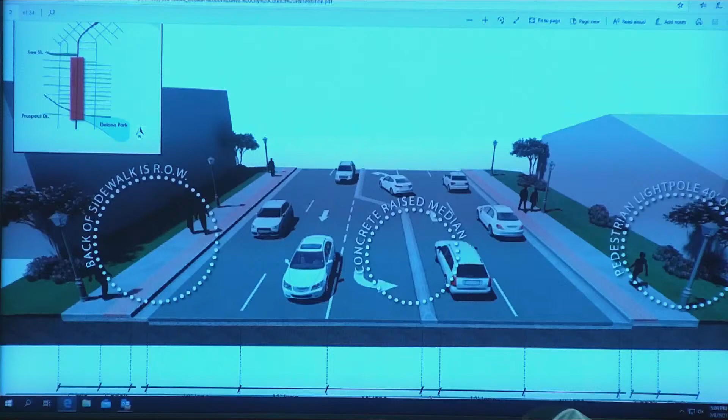On the Delano to Lee Street section, we looked at more access control, leaving that center lane open. On the other section, to the bridge, we did introduce a landscape median, and I can go through some of that. But basic elements of the streetscape, we're looking at adding pedestrian scale lighting. We're looking at widening the sidewalk and adding this paver colored buffer here. So right now it's pretty narrow, 3 feet wide sidewalk in some cases. We're actually expanding. Scroll up just a little bit. There we go.

Oh, there you go. Sorry, I just wanted to check out these dimensions down here. So we've got a 5-foot walkable area. We also have a 3-foot wide brick strip, total of 8 feet wide.

So right now when you're walking out there, it's 3 feet wide. You feel like you're kind of teetering on the edge. It's a little dangerous. Adding an extra 4 feet of width really gives people more confidence. They feel safe. This is psychological, that little band of pavement, but it really kind of works to make people feel like there's at least some separation between them and the lane widths.

As I mentioned, we are leaving the lane widths the same, 12 feet. We studied reducing them and doing some other things, but there are some real issues with that in ALDOT as they just improved this road. And to maintain the volume of flow, we need to leave the lane widths the same.

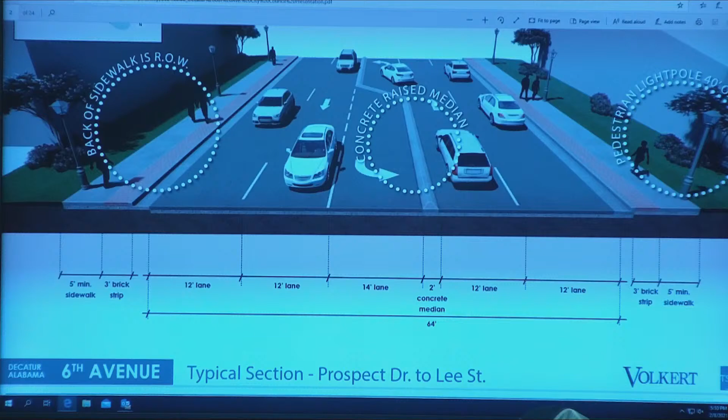And then Volkert did a very extensive look at access control on this section of road, which is basically turning movements across traffic, looking at intersections, looking at adding stoplights, and then also looking at mid-block crossings. We have plans all through the corridor we can go through. So next section, please.

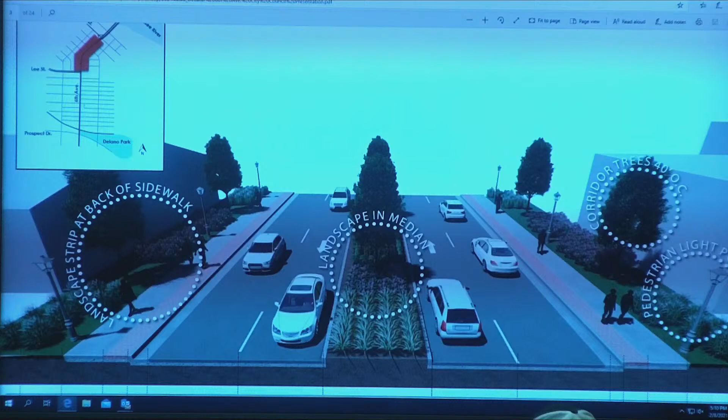Okay, so this is the other section with the landscape median. And this one's got a big tree in the middle of it, which we're talking about doing. But I think the important thing to note is the width of the center lane. In these areas, we don't need to be able to turn across traffic except at intersections. And where we're at intersections, we're actually tapering the height of the landscape down to 24 inches maximum. So we're leaving clear view corridors across the way.

And then we're also adding, just outside the right-of-way in this area from Lee Street to the bridge, some street trees to try and soften the edges, create a canopy over time. It won't be instant. These things take 30 years, but it's time to invest in it now so that when people arrive off the bridge, they're welcomed with this arching tree canopy.

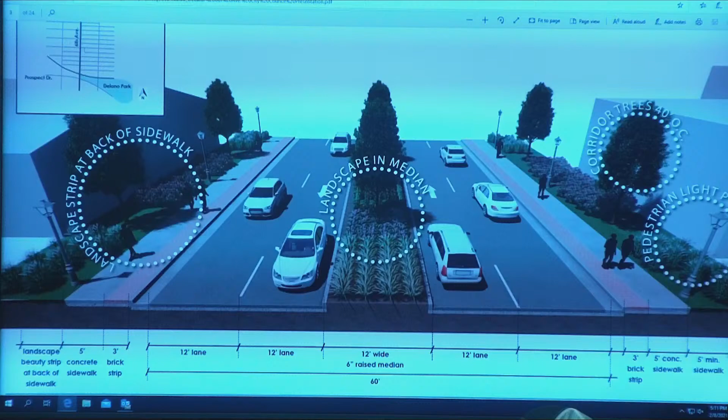Same idea down here with streetlights. So one thing to note is that on one side of the right-of-way, there's already an existing buffer. On the other side, it's going to be a conversation with adjacent property owners to see if they will allow us to plant shade trees in that area. So, next slide. Okay.

So, walking from Prospect towards Lee Street, we've got a number of these different elements that we just looked at. We've got the concrete sidewalk. We've got turning lanes where we need them, and where we don't, like here's an instance where we did some traffic control. And you guys can talk about this a little bit. We went to a median just to provide separation there, and in this case, I think this is where we added one of these mid-block crossings.

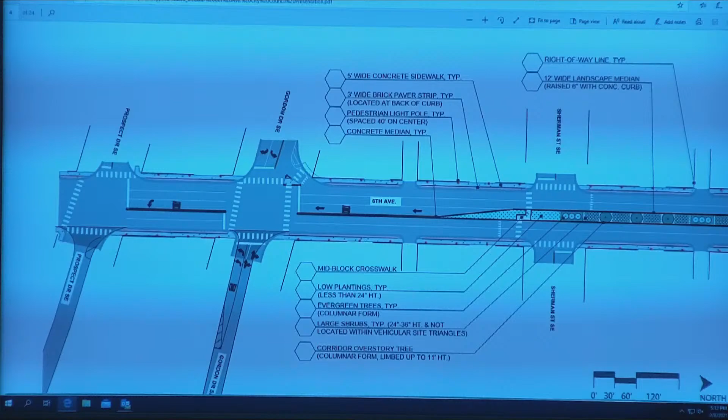So yeah, on those sections, this is at Delano Park there, and on the next slide we'll get to how to help the traffic flow in these two intersections that are so close together. But this is kind of a neighborhood feel, and a lot of the existing structures are really close to the roadway, so it's a lot tighter corridor here than it is as you go further north towards the bridge.

So on a couple of these streets, there's just not enough cross traffic, so we can add the median in to soften the edge, because we don't have room to soften the corridor on the outside because of the structures. We're using the median to soften the corridor in this area.

But talking about these two intersections at Gordon and Prospect around Delano, I'm sure everybody knows how close those lights are together, and there's schools and everything. It gets congested at certain times of the day. So one idea we had, and we talked to the school board about this and it seemed to have their support, was making Prospect and Gordon here on the east side one way. So it'd be a counterclockwise one-way loop. Can you go to the next slide, please?

So what that does is it basically takes those two signals that are kind of operating independently now and makes them work together with a one-way loop around the park. And then there's a lot of benefits to that. One, the traffic flow and safety on 6th Avenue is drastically improved.

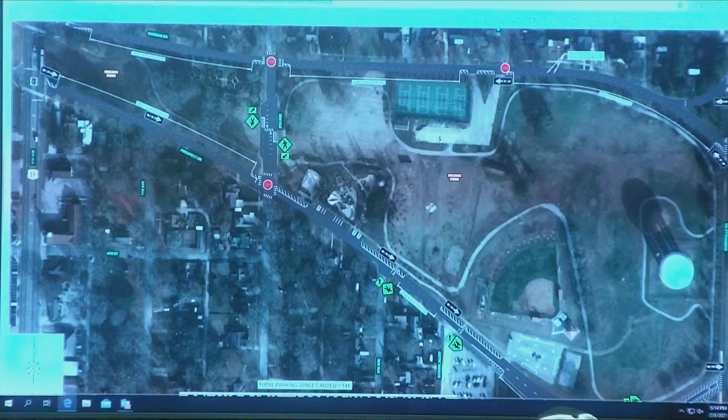But also, if we're using the same asphalt footprint that goes around the park now, and with it one way, we can actually add parallel on-street parking adjacent to the park to get better access and better utilization of the park. Also, with the traffic flows for the school, again, we worked with the school board about this, and this is what they prefer versus the clockwise movement, because of how their buses and their traffic come in, they come in and go to the alley here and do their pickup and drop off. So this actually worked really well with their traffic flow.

So it came out of the idea of how to fix the 6th Avenue intersections, but it actually became a pretty good idea around the park, and again, the great thing about this, we're not talking about any new asphalt, this is existing asphalt, it's literally restriping the current roadway and putting some signs up, that's all we really have to do.

Part of the discussion we had last week was what to do about this 8th Avenue portion that goes to the middle of the park. Right now, there are traffic signals at both those intersections, those don't really need to be there, they could be four-way stops and be just fine.

And part of that too was also doing some type of mid-block pedestrian crossing for the park, whether it's like a speed table with a pedestrian crossing or something like that, to make it safe for parents and kids going from one side of the park to the other, and also have a little more traffic calming there in the middle of the park.

So this Johnston Street is another one that we didn't feel we needed turning movements into. So they're pushing traffic down to this corridor, but I think in all those cases it looks like we provided. Yeah, that was one of the pieces of feedback that we got from the stakeholder group, even if we were restricting left turns in these blocks, allowing those pedestrian crossings to happen in those blocks to have that great interconnectivity between the neighborhoods on each side. And with the median in there, you have a nice refuge, so it's safe.

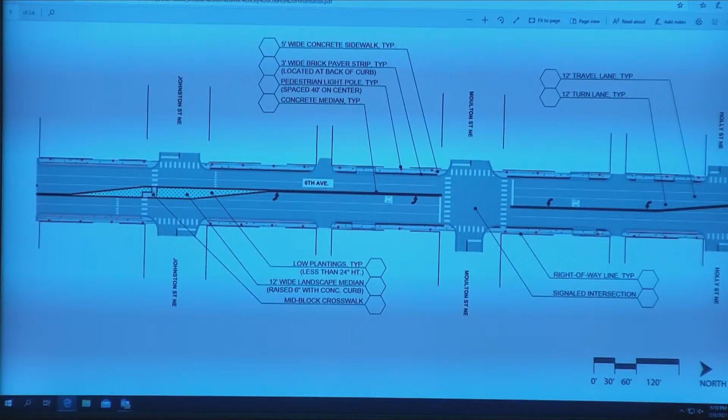You're not trying to sprint across 60-something feet of asphalt and traffic at one time. You can get to the median and get to the next one. And there's a lot of things you can do with those mid-block crossings with pedestrian signs and yield to pedestrian. So there's a lot of little details like that we'll have to work through on that piece. But the idea was to maintain that pedestrian connectivity in the neighborhood.

Other safety things you'll see as we come down farther this way, the drives are more delineated. Right now on certain properties, the entire edge is a driveway and the sidewalk's not defined. So a lot of what we're doing here is really just defining different zones, vehicle zones, pedestrian zones, driveway zones, not with the idea of limiting access to the parcels or to the businesses, but just clarifying and making it safer for people who are walking or for folks that are turning into those driveways. Next.

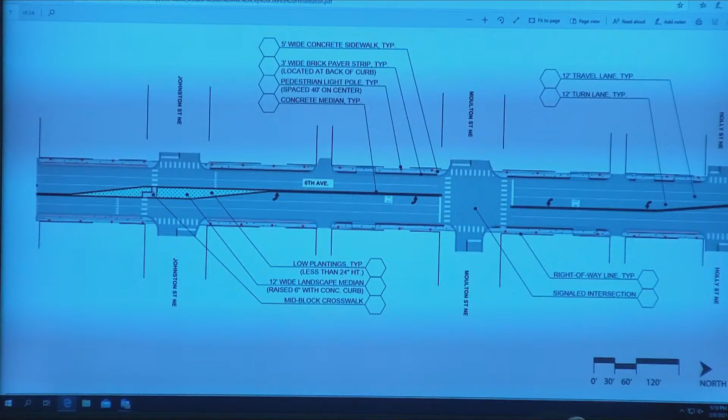At Lee Street, because it's the main kind of entrance into the downtown area off 6th, we're going to do a more kind of special intersection with pavers or colored pavement. Something that matches the kind of historic pavers, and we're also going to run anywhere that you turn into the historic district a band of those pavers. So you're kind of crossing a threshold into the historic district off of 6th Avenue.

This is where the really continuous median starts as well. And then we also looked at some traffic calming in this area. You've got a lot of lanes going into downtown and probably more capacity there than you need. So did we, and we added that parking there too?

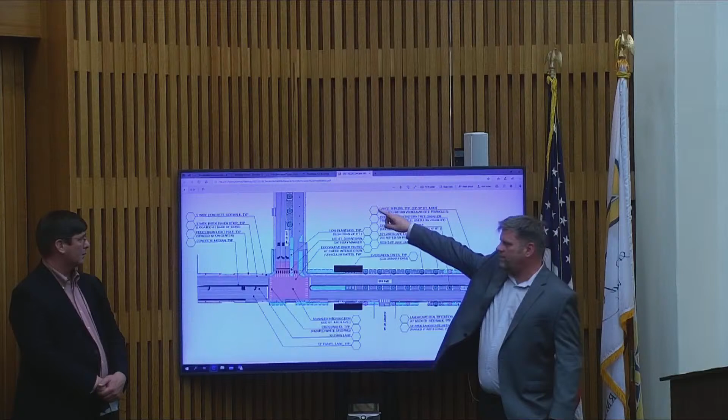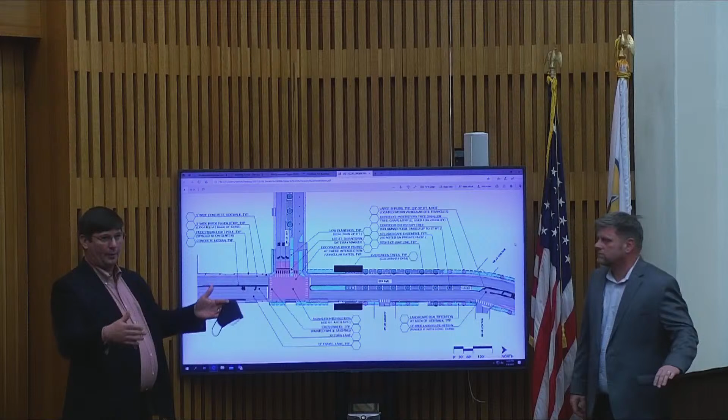Yeah, so that was kind of a similar concept that we're talking about around Delano Park, is that right now there's 2 lanes in, 2 lanes out, or actually 3 lanes out of downtown. And there's way too many lanes for the amount of traffic that's coming in using Lee Street. So again, putting it on a little bit of a road diet, reusing some of that asphalt area for some on-street parking and some landscaping areas can really enhance that entrance into downtown proper off of 6th Avenue.

So Lee is kind of where all that's happening. That's really where you introduce people. You already introduced them into Decatur coming over the bridge. Now we're going to introduce them into downtown off Lee. That was kind of the concept there.

Right. One other important thing that we have here is a marker. At Delano Park, there are those tall stone columns that are markers. We're also proposing a couple key locations along the corridor for a marker that's similar to that. It's going to be brick.

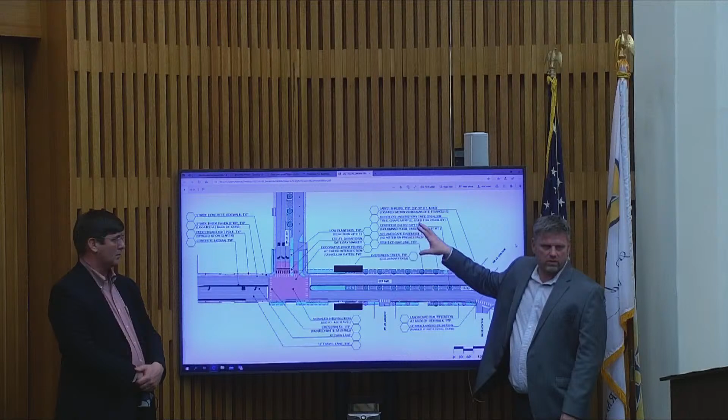It's not going to be stone because we want the one at Delano Park to have its own unique look and feel. So we're trying to make ones associated with the historic district and the entrance of town a little bit different, but to feel like they're in the same family. So we're saying one of those might happen there in the center island.

And then the other important thing about this is this Walnut Street intersection. I think it's the only street that we're just saying no access to, right? Yeah, so right now it comes in at a skewed angle in a curve, and it's kind of a dangerous situation on 6th. And right now, Katie, it's one way right now.

So one thing we talked about doing would be, if we cut off the access to 6th, but also make it 2 ways, so it becomes strictly a residential street. And it becomes a lot safer because you can see the sight distance and that curve and all. It's just really not an ideal situation.

But we did leave the left turn into the east side of Walnut because of some of the commercial uses over there. We kind of had to maintain some delivery access. So that left turn onto the east side did remain.

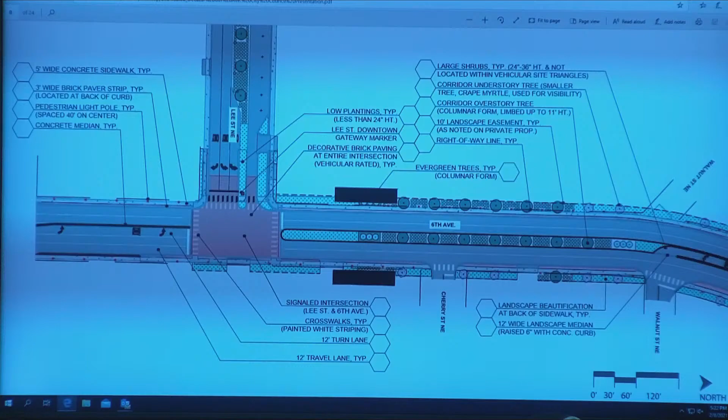And remember when I was talking earlier, I mentioned the landscape easement area. That actually would start up here. This dashed line is that easement. We have constricted right-of-way here that just ends at the back of the sidewalk. So to get the street tree feel, that's an area that we would recommend grabbing an extra 10 feet of some type of easement that would kind of add to the character of the street.

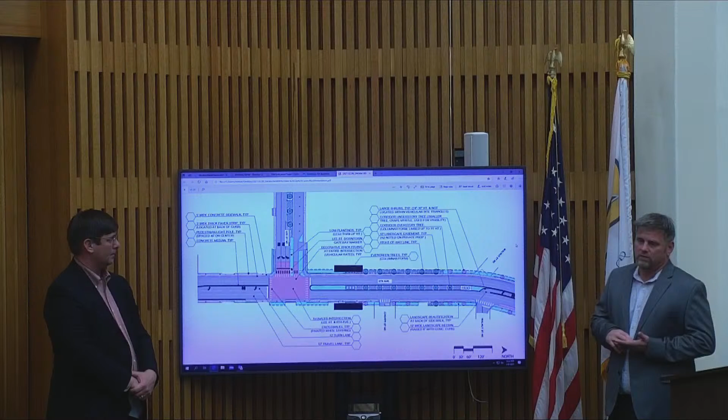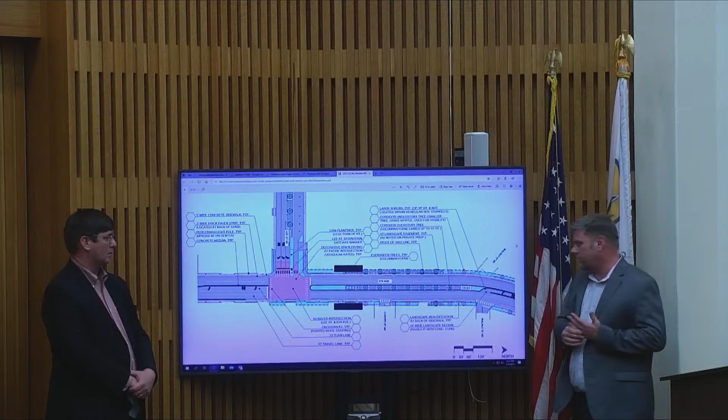That also is a way to bypass some of the ALDOT requirements not to have larger trees in the right-of-way. So doing that allows us to put larger, more mature canopy trees adjacent to the right-of-way that y'all would own and take care of. Fine.

So this is kind of more of the civil plans, talking about the traffic flow. We've covered a lot of this already. This is back on the Delano Park.

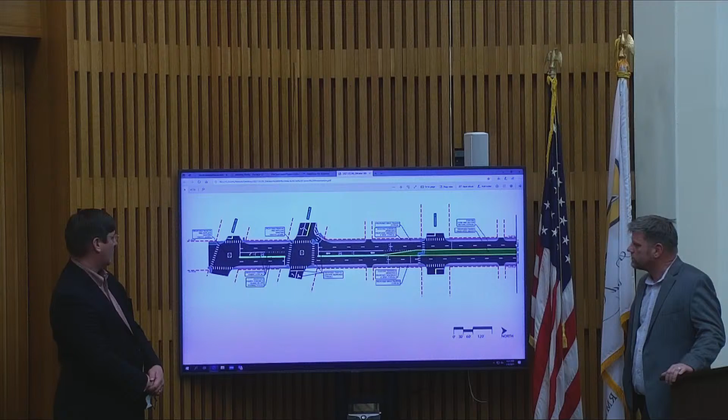Hey, Jay, do you mind, I think people are struggling to hear, if y'all can just swap out. Okay. Thanks, man.

So I think here we pretty much already covered all this. We talked about the mid-block crossings there at Sherman and Johnson and Cabot Street. So you can keep going.

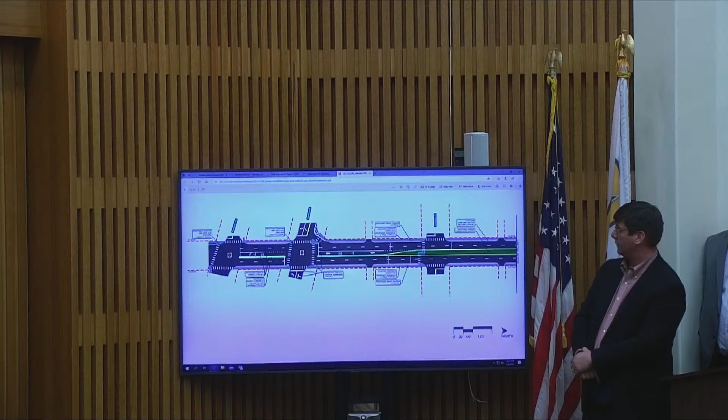One thing that I didn't mention earlier. So during this process, we've got about 7 or 8 intersections left that will have signals. Anyway, these key intersections, everywhere you see a traffic signal, this is at Grant here. Part of the plan is to take down the span wire signals now and put the mast arm signals to really clean up the kind of vertical clutter you see with all the lines going everywhere.

And also working with Decatur Utilities, we figured out that most of those overhead power lines actually only serve street lights. So these new street lights we're talking about putting in, that power would go underground. So the majority of all these overhead power lines would actually be underground, and all that vertical aerial clutter would kind of go away. Keep going.

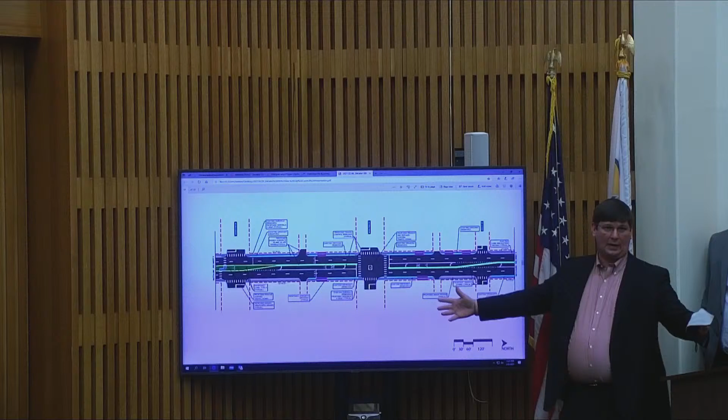Between Moulton and Holly is where you start seeing some of the edge improvements that Brian was mentioning. Right now, a lot of these parcels just have one big wide driveway that covers the entire width of the parcel. So what we want to do is, we're not going to cut off any access, but we want to define their driveway points and consolidate that to one area.

Because when you have that big wide driveway, it creates safety problems for cars, not knowing where they're supposed to be. But also, when you introduce the enhanced pedestrian improvements, it becomes really confusing and unsafe for pedestrians walking across those big, giant driveways. So we're going to try to define those different areas by use. So it really picks up here at Moulton and carries on pretty much down to Wilson. Next slide.

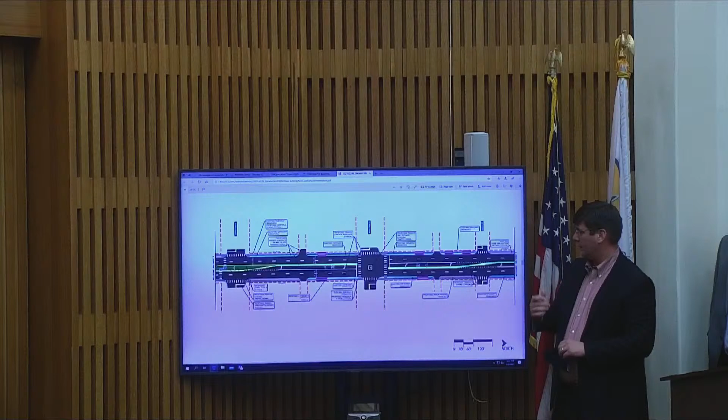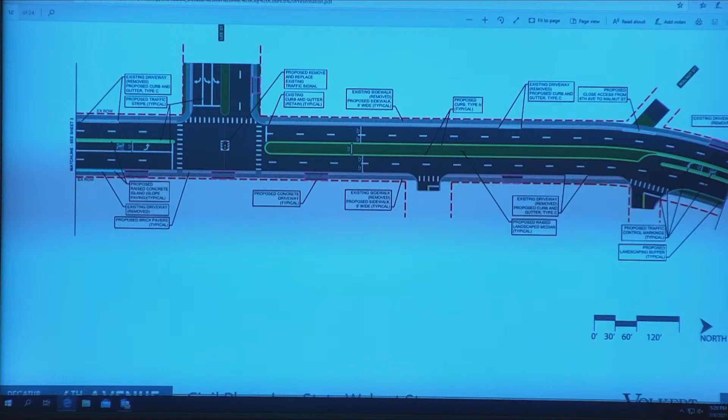So here we are at Lee, and again, we have a mast arm traffic signal there at Lee, and the stuff we talked about at Walnut. One thing we've been working with ALDOT on, that they would like to see us work towards as we upgrade these signals, is setting up the technology and the equipment to have some type of adaptive signal program or synchronized signals, so that it's going to help traffic flow through the corridor and reduce the congestion.

So a lot of these things we're talking about, it's really a lot about beautification. But a lot of things we're doing are going to eliminate these conflicting traffic movements, and increase the efficiency and safety of the roadway. So cars will be going probably at the same speed or maybe a little slower, but they're going to have less impediments along the way. So it's actually going to improve the congestion along 6th Avenue from a traffic operations standpoint. Next slide.

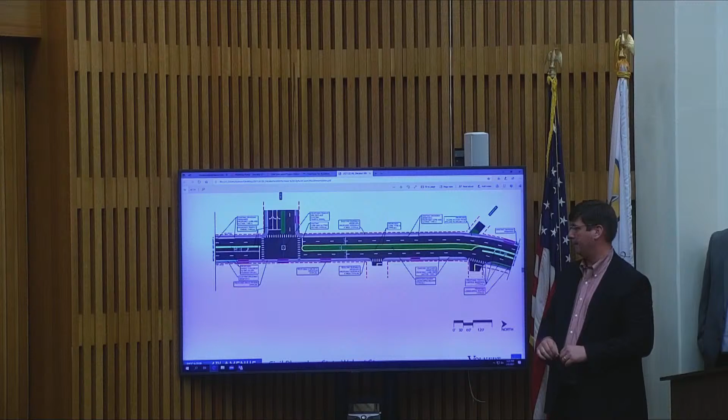So Brian, you can take this one. Yeah, so we did a couple of visualizations. You can scroll up just a little bit. Not quite fit on the screen, but that's okay. So this is at Lee and 6th Avenue, and we superimposed this on Google Earth and made some changes to show you how this would all run out.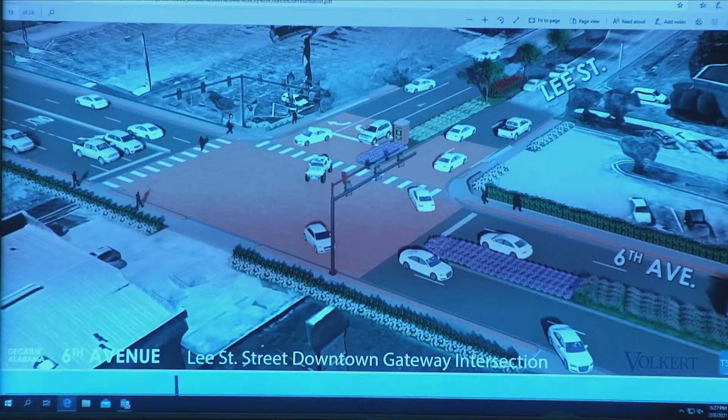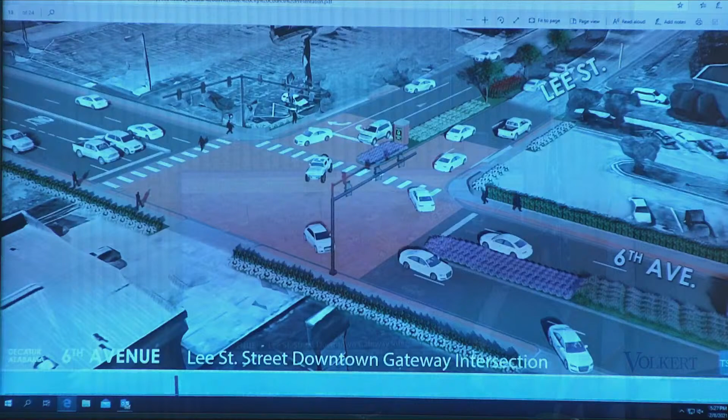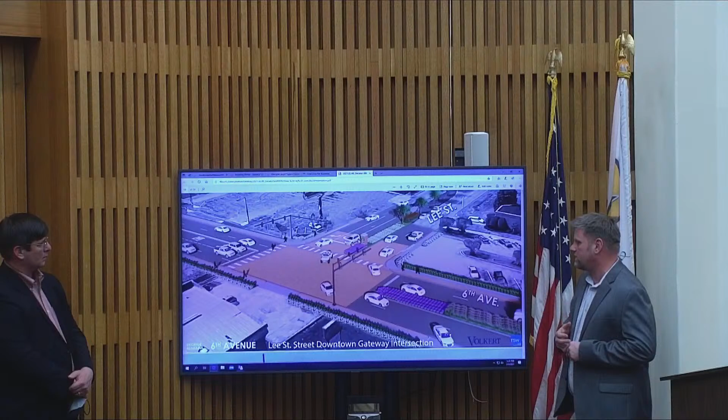So we talked about adding the new lights. We also have taken away the overhead lines, and then I mentioned earlier this large brick area that would signify that this is the gateway to downtown, and then you can see how the landscape might happen in that area, and I'll show you more images of that, but that's what one of those little brick markers would look like. Subtle, classy, and it works with the existing sign standard that y'all have been using. Next.

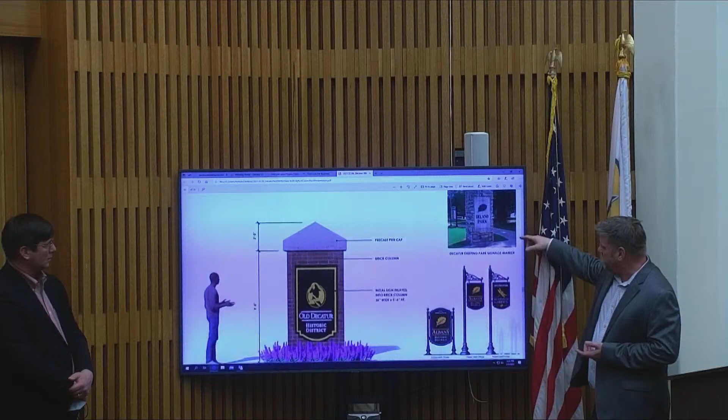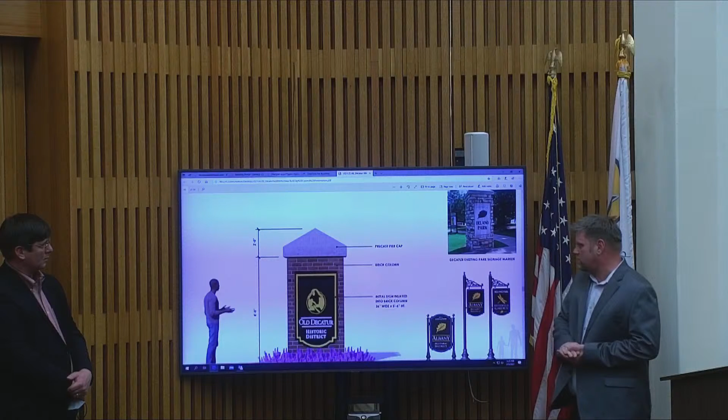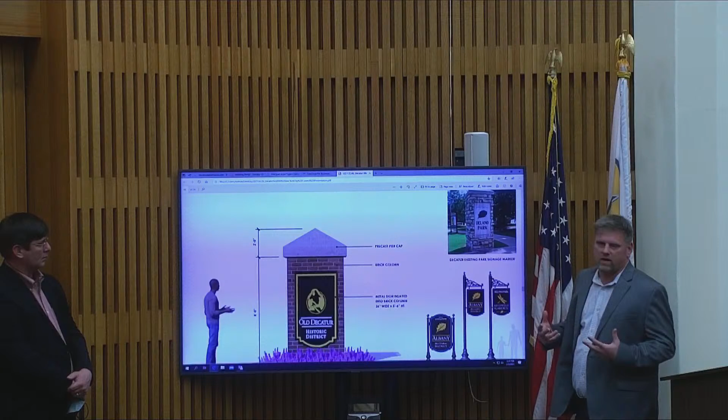And then you can scroll down just a hair. So this is Delano Park, and this is what we're proposing, which is really just a brick version that keys into some of this historic signage that has been developed for that area. And this is just representative. I don't know that we've finalized that, but that's the type of decal that we would do on that sign. Everything else would match exactly, so you start to have a rhythm happen with the signage.

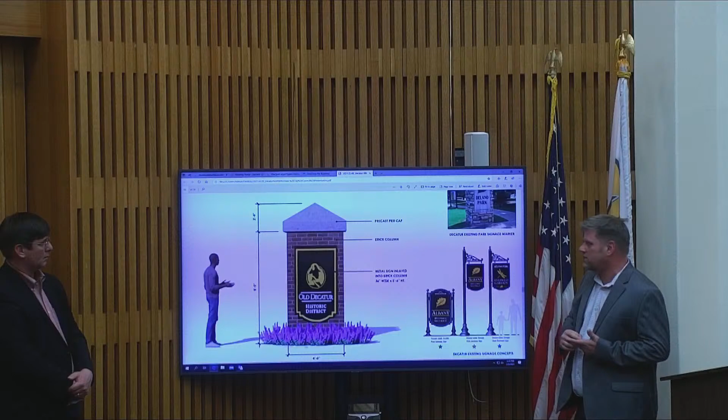And then we can also use these smaller ones, which you guys are already using to identify historic districts, as well as supplementary signage. Next.

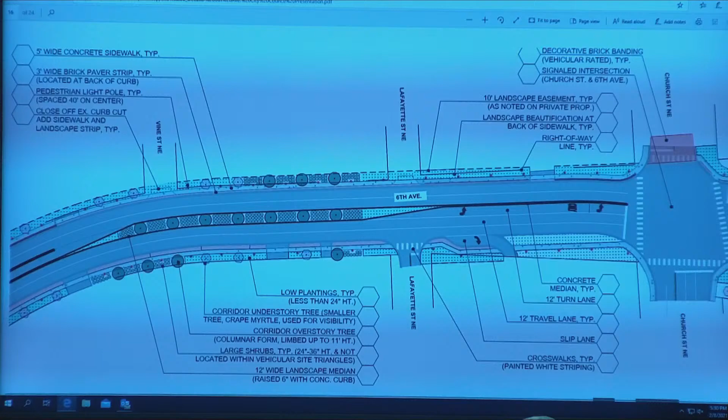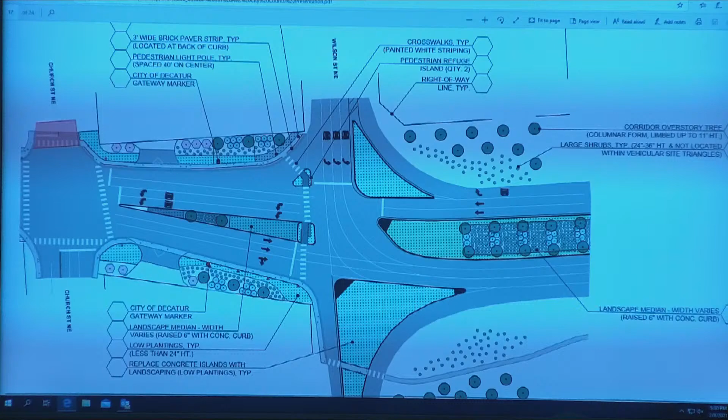And this is the big kind of intersection at Wilson Street. So we're maintaining all the traffic flows that are there right now, but I think the big difference is these are just concrete medians right now, and our idea is to demo the centers of those out and add landscape in those areas to really kind of soften that welcome.

There's also that big mast sign. Yeah, there's an overhead sign there. We're not going to use that. We're going to take that down and replace it with a couple markers on either side of the road. So something a little more subtle.

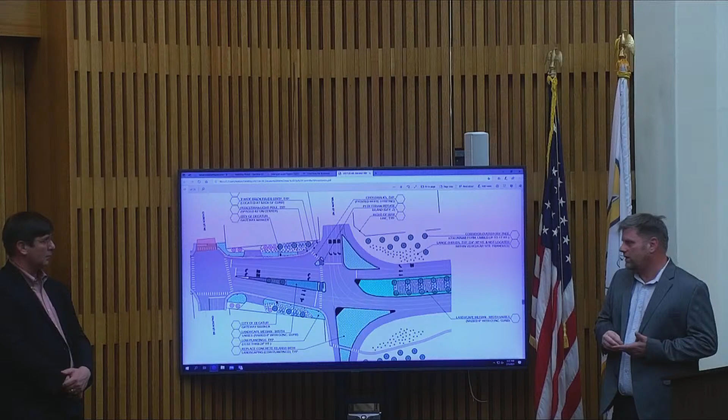And then the welcome's really going to be the big trees and the arched branches and a really nice kind of landscape expression, which y'all have already started over here. We're just going to continue doing that at that intersection. And then also some crosswalk improvements as well to make that safer. Next.

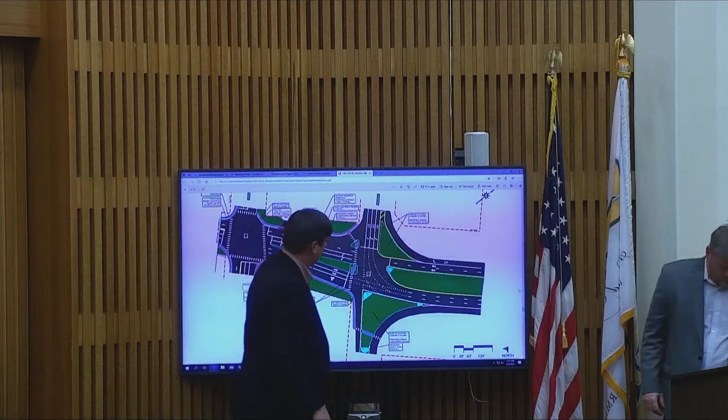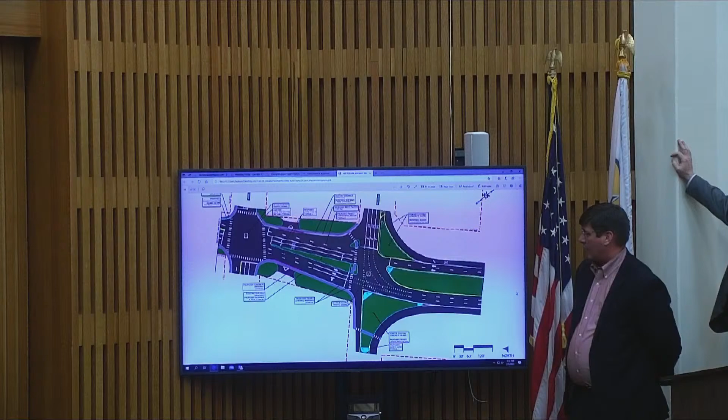So yeah, I think Brian pretty much covered it all, but working with the DOT, a lot of the improvements they had just done at Wilson Street, we believe the traffic patterns are pretty much the way they are, but we're just trying to enhance. Some of the crosswalks, there's already a nice path going down under the bridge right there on the east side. And like Brian said, the DOT does those big concrete medians really just for a maintenance reason. It's easier for them to maintain.

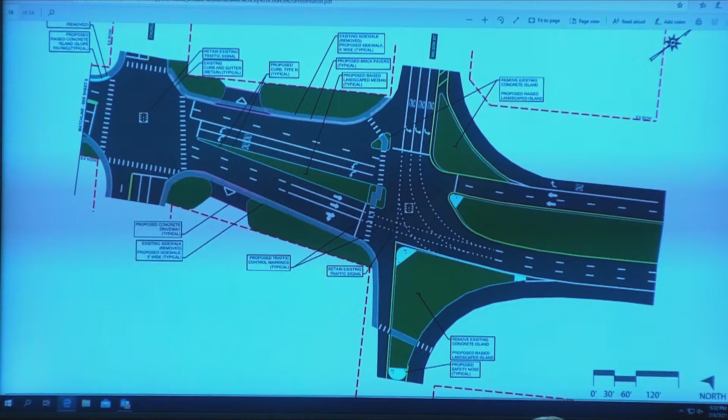So just kind of taking this big piece of the concrete out, the curbing would stay in, but the middle would become landscaping, and also soften this transition median area and put landscaping there. It just really softens that entrance when you come across the bridge. I think there's a little bit of driveway consolidation here, but not much. I think the DOT's already done most of that. So there's not a whole lot happening with the driveway accesses. Next slide.

And again, this is kind of that same section going up with a nice big consistent median all the way up to the chamber building there at Walnut. We do have a little bit of driveway consolidation and cleanup on the edges, just again to better define those spaces. Anything else to add on this?

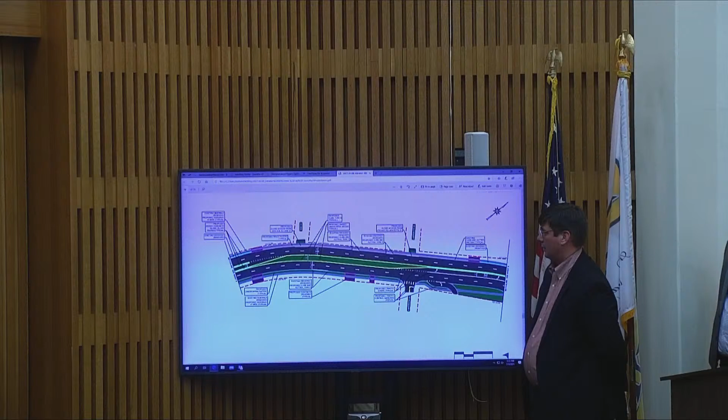Oh yeah, Lafayette and Vine would be closed, just like Walnut, because there's a lot of connectivity in the neighborhood. With the sight distance and the curve, there's just not enough traffic and reason to leave those connected, to be able to make that section a little bit nicer. Next slide.

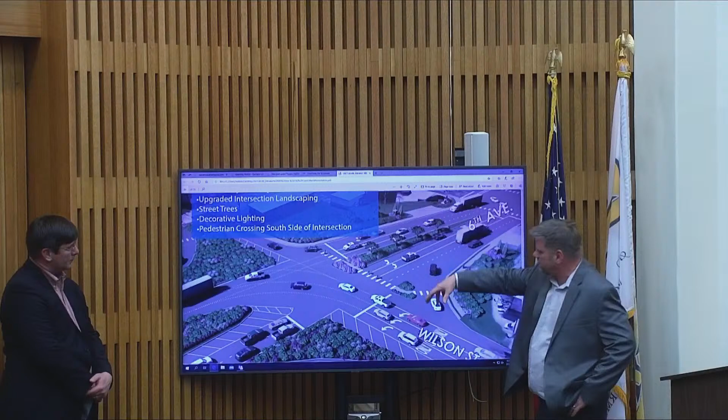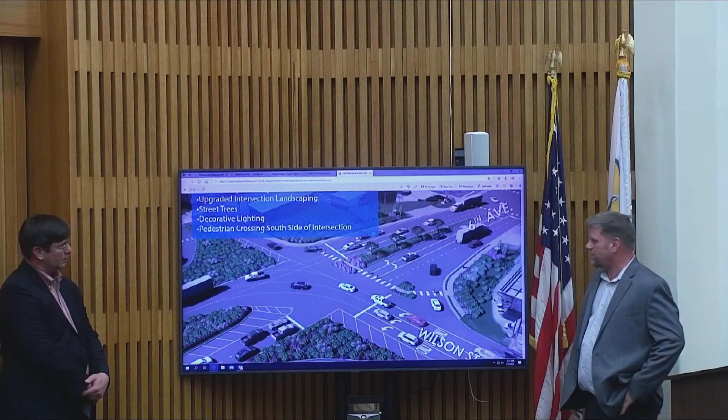And here's an aerial view of this intersection as well. Coming down off the bridge, this is kind of the welcome view, and you can see the markers on either side there, and no big overhead signs. So just something that's scaled more appropriately to the scale of Decatur, which is friendly and inviting, which I think is what we're really going for, and beautiful on top of that. Next slide.

Here's the car view of it, and I think one of the great things is we're not going to block it, but we are going to soften some of the harshness of the commercial down there. And there's always a balance with that. We don't want to block signs and deprive anybody of views to their business, but we just want to soften it and make it more inviting. You can see we have a poorly placed van here, but the marker's right behind it. So next slide.

And we talked about this. You can keep rolling through this. A couple things, we didn't really show these in the plans, but one, because we're kind of talking about streetscapes and ideas that you might use for the streetscapes, we feel like there's already a pretty good vibe going on here, a classic vibe for street furniture. We'd like to do something simple that's kind of timeless. We can do the same thing with lighting and trash cans.

There's a lot of interesting art that we've seen around town as well. And we thought there might be opportunities to integrate art with things like bike parking and other things, so that when there aren't bikes on, there's something that's fun and interesting to look at. So we threw a couple ideas on here about that.

Next slide. And then I won't go into detail about this. This will be online if anybody wants to geek out on landscape plants. I'll be glad to answer questions about that. But I think the key things are, we've got to keep things low and small in the right of way proper, because things like cars running over curbs and hitting things happens. That's just a reality of life, and we don't want to put anything in there that's going to hurt somebody if they hit it.

So ALDOT really wants us to focus on keeping plants low, so visibility is good, and the calipers of trees to a reasonable size, so that trees aren't stopping cars, they're just breaking away and not hurting folks. So that's kind of our high level approach to the landscape now, until we really start diving into details on it. Next slide, I think that might be it.

Ryan, along those lines, you might mention too, moving the utility poles back away from 6th Avenue from a safety standpoint. Yes. As we know who live here, the utility poles are right up on 6th Avenue, so if a car leaves and jumps a curb, it's really dangerous. Well, hopefully we're getting rid of as many of them as we can.

Yeah, that's kind of what I was mentioning earlier, that 90% of those poles that are right on the edge of the curb now are just for the street lights. So we're talking about taking those down, moving those pedestrian scale street lights further out towards the businesses. There are some distribution lines right there, Wilson up to Walnut area, that we're having to leave in place for the time being, or at least that's the plan right now, but thinking that over time maybe even that could go away.

Here we go. All right, so what we talked about doing with DOT, because it kind of had the same situation here and at Wilson with that overhead sign, is that once that overhead sign goes, you still have to have that signage somewhere. So what we would do is find a location on the edge that would be directional, and you could even add legend on the asphalt, which the DOT does as well, to make sure people get in the right way.

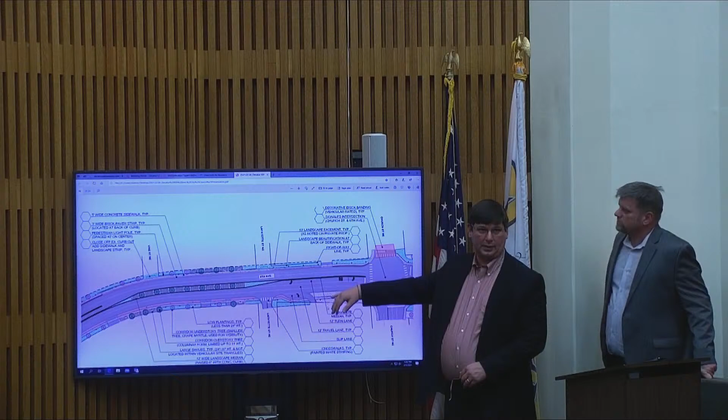That's probably gonna be the only solution, because if you don't put something above them where they can see it or across in front of them, they're not gonna see it. The only solution is gonna be on the road. Because if you keep it narrow like you've got it on that other slide, people are not gonna be able to see it.

Right. Yeah, so that's one of those things that at the end of the day, it's probably gonna be a combination of signage and some pavement markings. And you could even have some advanced signage further up the street here to let them know early, like, hey, get in this lane if you're going west or whatever. When I say signage, I mean traffic signs. We're not really showing any of the plans right now, but there's a lot of things that would have to happen to make sure people know where they need to go from a traffic standpoint.

Yeah, question. How long is this project gonna take? I'm assuming there's gonna be a detour. People coming from Huntsville into the city are gonna have to detour to get to their houses. I know we have hundreds of people coming in from businesses in Huntsville into the city, so what's the estimated time?

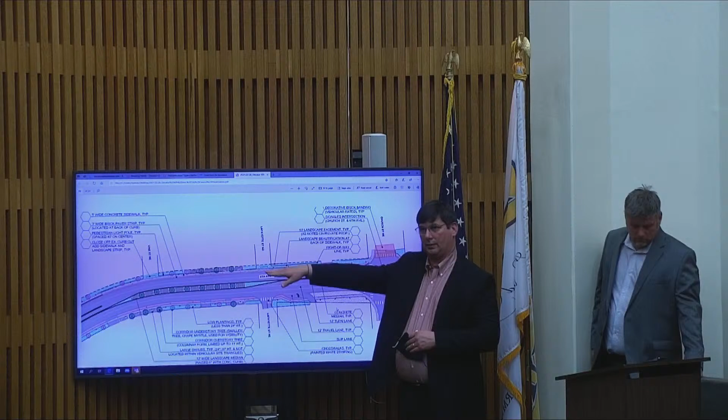So really, we would not have a detour. We would have some lane closures, but not a detour. The one exception we'll have to look at in close detail is the Lee Street intersection, because if we start talking about pavers, you can't really close a lane. You've got to close the whole intersection. But with the exception of that one intersection, the rest would remain open. For instance, if we're doing the median work, we would close the inside lane, have the outside lane open, and flip it over when you start doing the edge improvements.

The other thing, because this is right in downtown, is maybe doing night work, because there is a lot of traffic on the corridor. There's a lot of things like that we would have to consider on the implementation side to limit the disruption to normal daily life of businesses and residents. So yes, there's definitely a traffic control plan, but we would never want to close down the whole corridor. We want to just do lane closures and leave as much of it open as possible.

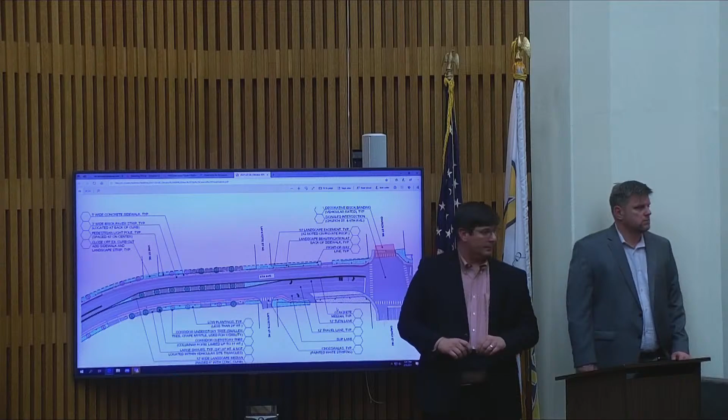I've got two questions. On some of the renderings, they were showing trees in the medians. If we do that, how do we guarantee as these trees mature that they're not outgrowing and buckling the asphalt? And the second question: is ALDOT going to sign off on a brick monument sign in a median? I know they're very peculiar about what they allow on rights of way and medians.

Yeah, and we've started that conversation with them, and actually have a little list of things to consider, which is kind of early comments in their world. Answering the monuments first, they said, hey, we just need to be careful about where we place them, because there's clear zone issues we've got to address. Luckily, where we're talking about doing it, we have room to work around. I think we'll be okay on that side.

The trees will be a little more of a tricky situation in the median. The caliper of trees that they would even allow in the median would be so small, buckling would actually never be an issue. Gotcha.

So the question is, do we want to have smaller trees, something like a crepe myrtle that has a really small trunk but has a nice head and flowers and everything? Because they stay pretty small, they're kind of breakaway. That's one application. Or you could just look at, well, if we have the more shade trees on the outside, maybe just do more low-level shrubs or something in the median. So there's a lot of little details like that.

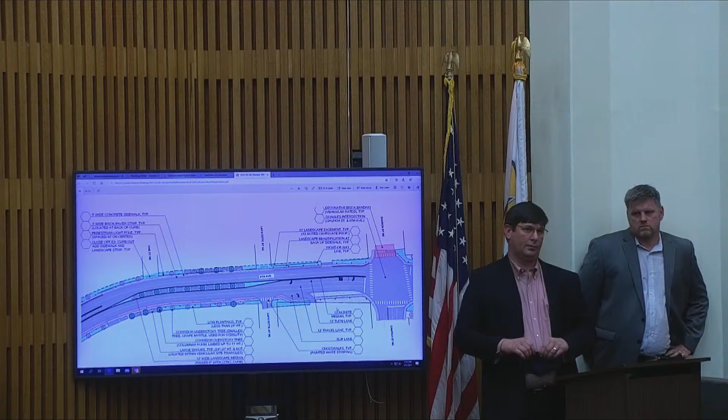Okay, any other questions from council? I have an email I'm gonna read. Oh, Kent, did you want to speak? No question, but I do have a comment. Do you mind, Kent, so people can hear you? I'm sorry. Used to call them the same thing. Yeah. Need your name and address.

Name and address. Council, my name's Kent Lawrence, and as most of you know, I've been involved in the One Decatur Comprehensive Plan from the beginning. The plan was developed through community input and participation. It wasn't developed by the city government. The plan has about 140 actions in it, and I'd like to read one of those action items. Redefine the 6th Avenue Gateway.

As the primary entry to Decatur, the appearance of 6th Avenue between downtown and the river fundamentally shapes visitor perception and community pride. The city should focus beautification efforts on this area through capital improvements to the street lighting, landscaping, pedestrian facilities, utilities, and also through zoning updates that support higher quality design and pedestrian scale development.

In October of 2017, the draft of this plan was first presented to the city at the Princess Theater. Then it was on display for another 3 weeks throughout the city. Citizens were asked to rate the actions in the plan, and out of all the actions, redefining the 6th Avenue Gateway was the top action. So I think it's safe to say that many citizens of Decatur would like to see this development happen, and I encourage the council to find a way to make this project happen.